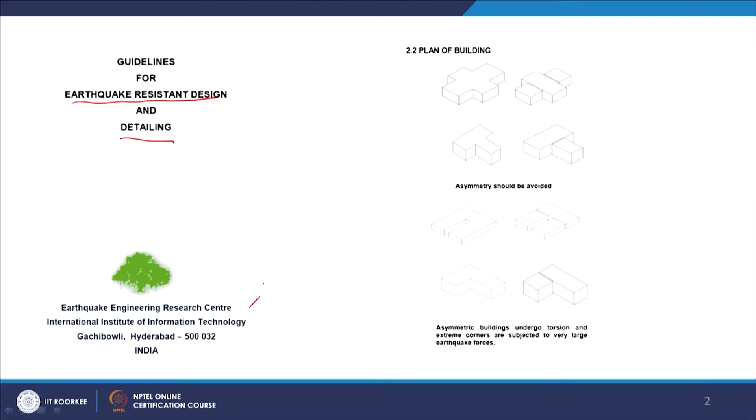For example, this is a guideline developed for earthquake resistant design and detailing by EERC, the Earthquake Engineering Research Center, International Institute of Information Technology in Gachibowli, Hyderabad. They have set up a lab, worked on simulations, and concluded with various evidence based analysis. They developed a small manual which gives thumb rules to inform built environment professionals, for instance an architect or a civil engineer who is constructing housing.

When we talk about the very basic form of house composition, planning of a house or a dwelling, we follow certain elements and principles of architecture, and then we compose. In this composition process, as far as earthquakes are concerned, they recommend avoiding asymmetrical compositions in earthquake prone areas, because asymmetric buildings undergo torsion and extreme corners are subjected to very large earthquake forces.

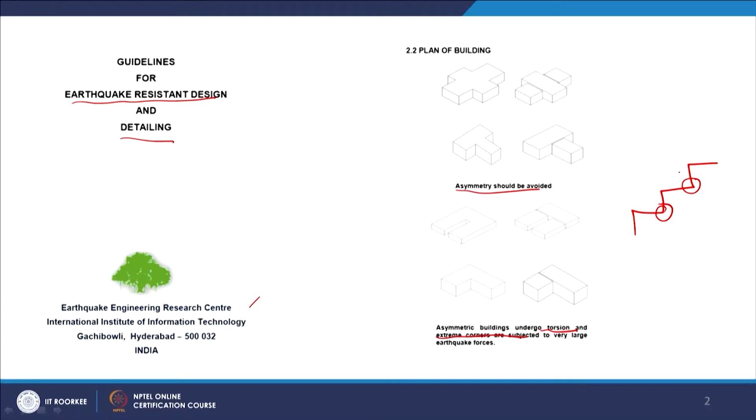So obviously, if you have wings and many offsets in the buildings, there is a tendency that these corners can break, because most of the damages we have noticed in past earthquakes mostly occurred in the corners. That is why they suggest avoiding asymmetrical building forms.

Some of the other guidelines talk about site selection. When you are constructing a building, try to keep sufficiently away from steep slopes. Also, when you are cutting and filling the soil, try not to make the foundations in the filled up soil, because it might come down and the whole load will collapse. There is a possibility that the building may collapse at the time of an earthquake, because the forces cannot be stabilized due to that filled soil.

Regarding the shape of the building, they suggest that very slender buildings should be avoided, with the height to breadth ratio less than 4. Inverted pendulum type buildings are unstable, so they go with a pyramidal type, so that the load is distributed. Otherwise, the more height you go up, the more difficult it becomes, with wind movements and lateral forces applied onto the whole structure, and how it can resist them.

For instance, in Hyderabad, we have a nickname, Malakpet Buj. It's a tall tower which has been built in a place called Malakpet, and you can see that it has almost nine floors with the ground floor, G plus 9 floors.

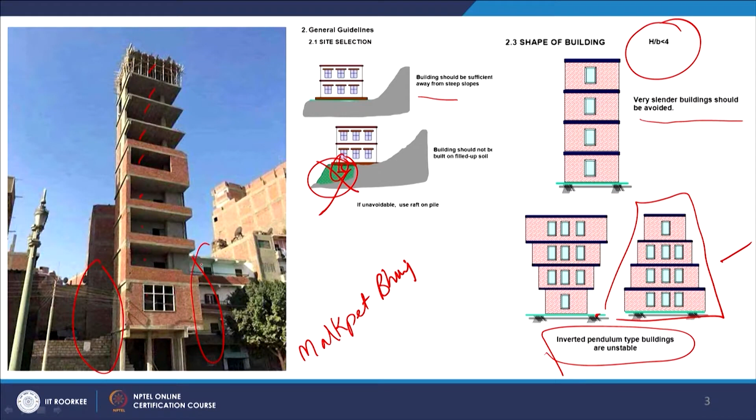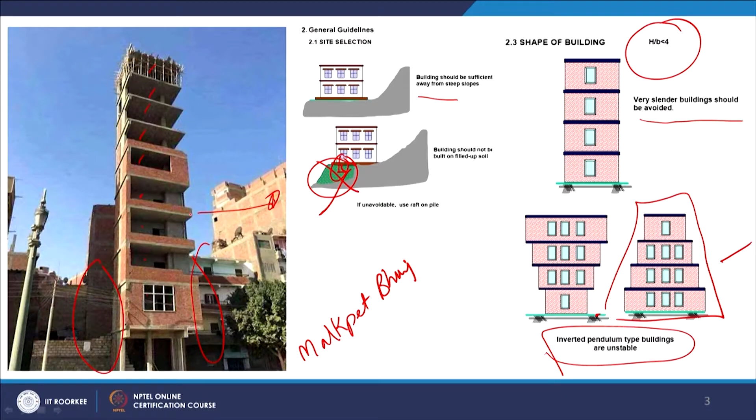And look at the volume of the building, look at the height and breadth of the building, and also look at what is on the adjacent sides. If some slight movement happens, you can see that the next building is also coming up at similar heights. So certain towers are not leaving any setbacks, and they are not considering proportions, how the proportions of height and breadth have to work.

And this is where, despite the building regulations, the building bylaws, the permissible limits, yes, he is going within that permissible limit, but is it really worth it, and can it resist the earthquake forces during an event? So these are some mismatches between what the building bylaws permit and what the earthquake guidance is telling. There should be a consensus between the bylaws and the structural measures which the guidance manuals suggest.

And similarly, a sudden change of lateral stiffness should be avoided. When we are increasing the height, you should not increase it so that there is a sudden change of lateral stiffness, because otherwise there is a chance of collapsing.

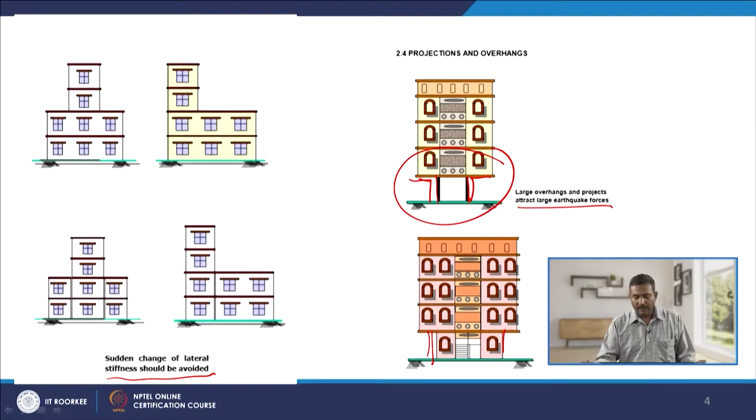Similarly, projections and overhangs. Here, just on two stilts, the whole building has collapsed. This is very unstable, so you need to have some kind of support system. With these kinds of large overhangs, you are keeping load over a load, and it may collapse. Large overhangs and projections attract large earthquake forces.

Similarly, the separation of dissimilar buildings. When you are talking about two different buildings, if it is a load bearing structure, you should have about 15 mm, if it is an RCC frame, it should have 20 mm, and if it is a steel frame, it is about 30 mm. At least this much gap should be left to avoid collision between adjacent dissimilar buildings.

Also, we should try to avoid heavy mass at the top, because in the previous building culture, they built overhead tanks with heavy volumes. But during the movement, that can add load and bring instability to the whole structure. So the advice is, instead of a large tank, you can have smaller tanks connected to the water distribution system, so that you will not get those load aspects.

These technical manuals also talk about the type of reinforcement and the connection details. For example, for a 1 feet beam, they talk about the reinforcement, the stirrups, and how the clear cover has to be done. The stirrup details are also given as guidance, how to mold them, what to do and what not to do.

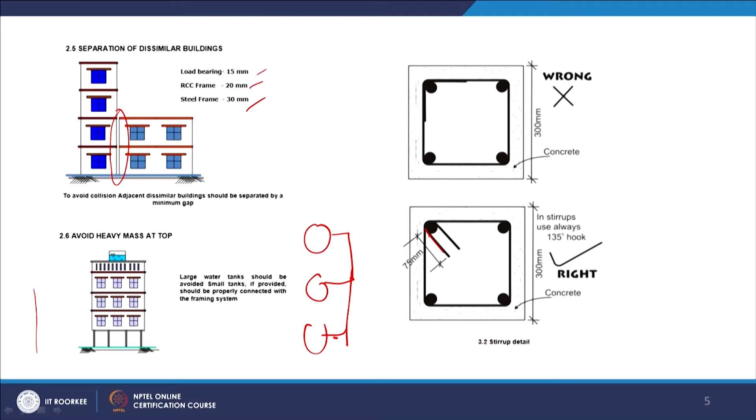After the tsunami, the Government of Tamil Nadu, with the help of the Revenue Administration Disaster Management and Mitigation Department, developed guidelines for reconstruction of houses affected by tsunami in Tamil Nadu. I'll show you a brief of what is in the guidelines, and I'll keep discussing various guidelines. They also talk about the wind and cyclone zones.

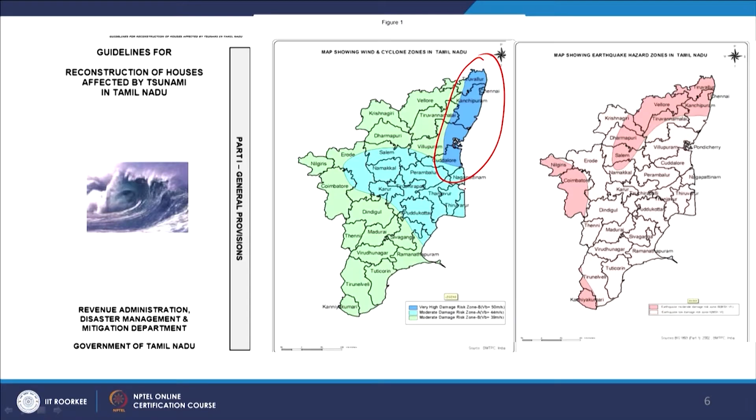For instance, this is the high damage risk zone, more towards Chennai, this is moderate, and this is beyond the cyclone aspect. Whereas in the earthquake map, this zone is more earthquake vulnerable. Also the hilly areas of the Nilgiris, a bit of Kanyakumari, and the part of Kerala where the Western Ghats meet near Nagercoil and other places. So these are the vulnerable areas.

But when you see these kinds of maps, you should not look at them in an isolated manner. You have to also consider the multi-hazard prone aspect. The same district might be cyclone prone and also an earthquake hazard zone. So one has to look from that perspective.

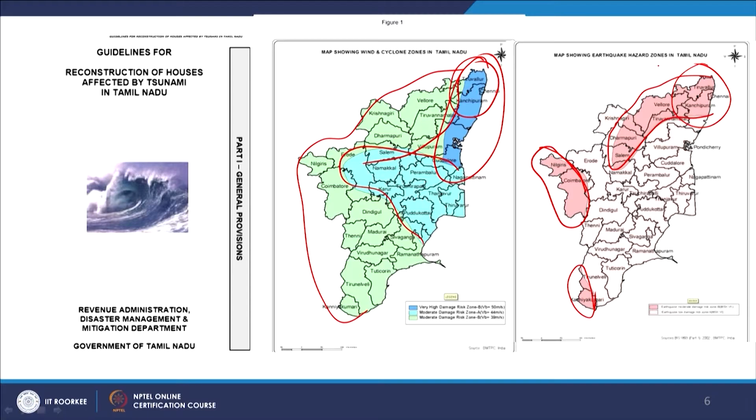They also talk about the CRZ regulations, the coastal regulation zone implications, like at least 500 meters from the shore and plus 5 meters from the mean sea level. So they also talk about, because if you don't raise it, either you improve the height of the plinth of the building so that if there is a tsunami, or you raise the plinth so that at least this will be taken care of.

Similarly, there's the desirable conditions. When you talk about building near a ridge, it attracts high wind velocity, but buildings in a valley are protected from high wind velocity. I would also bring a counter aspect of it. It also depends on how the makeup of the hill and the landscape is all about, because sometimes if you have another hill, that becomes a tunnel effect, and the wind gets channeled much more fiercely. So there's no shielding from high wind due to absence of a barrier, and that is where you need to talk about the landscape, how we can promote the landscape so that it can actually reduce the velocity of wind and have a control mechanism over there.

As I discussed to you in an earlier report, which talks about the planning requirements, don't make asymmetrical plan forms, and also don't have too many offsets. Here this is like too many offsets, it's asymmetrical. Try to make more of a defined shape, because that is where you can even have diagonal bracings, some kind of support system, so it is at least bound to it. This plan should be square or rectangular, and if it is rectangular, you need to have intermediate support systems into it.

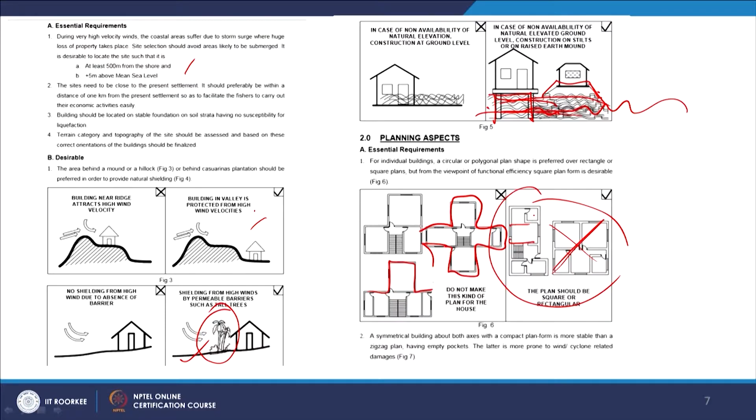Asymmetric buildings with empty pockets are more vulnerable to damage, so don't leave these empty pockets. Try to fill that, and that is where these are more stable. The symmetric buildings are more stable.

Also, when we talk about row house planning, it also creates wind tunnel effects, because the moment your houses are one step to another next to the shore, it channels the wind, and that is where it can damage the edges of the walls or the corners. So even the zigzag planning can avoid wind tunnel effect. How you can actually give a little bit of vastness and then reduce it, so the zigzag pattern as well can have some control. It depends on how you are actually orienting it.

Similarly, the long face of the building facing the wind direction - in fact, if you ever visit the coastal villages of Tamil Nadu, most of the time the short face of the building is facing the wind direction. Whereas on the horizontal face, they have fewer openings - if they are facing that side, they will have fewer openings, otherwise they mostly orient so that the shorter side faces the seaside. That is how they are oriented.

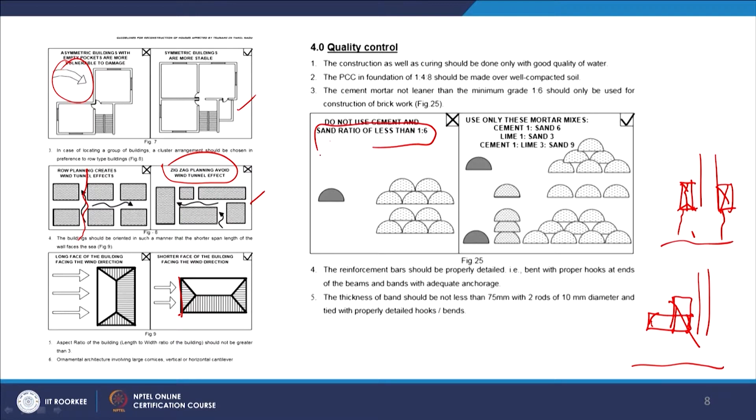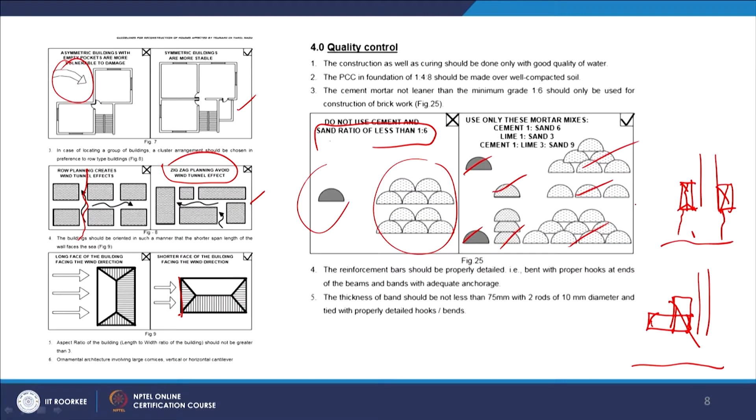Similarly, these manuals also talk about quality control, in terms of the material and what ratios we have to include. So when we say do not use cement and sand less than 1:6 - for 1 part cement and 6 parts sand, you should not make use of a mortar mix less than 1:6. It is recommended to use 1 cement and 6 sand, or 1 lime with 3 sand, or 1 cement, 3 lime and 9 sand. This is the kind of mortar mixes which the guidelines normally recommend. At the end of the day, all these come from the proper IS code, but these are only thumb rules.

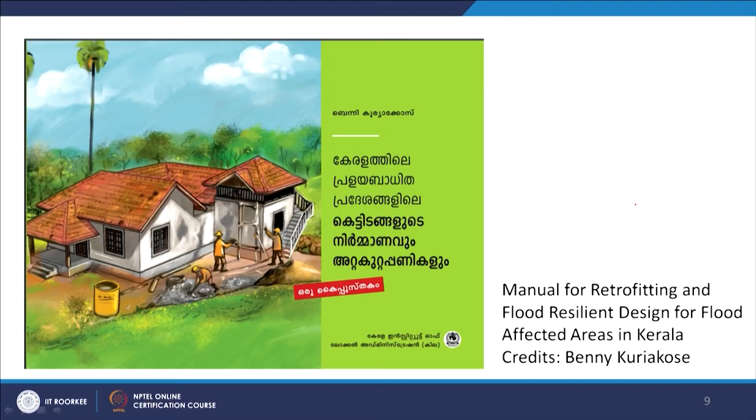Many of these manuals, when published in English, become very hard for a local mason to understand. That is where recent efforts have been done by architect Benny Kuriakose after the recent Kerala floods. He developed a manual for retrofitting and flood resilient design for flood-affected areas in Kerala. The Malayalam version is already printed and the English version is in process, but I could still show you some images of his work, which is very diagrammatic and illustrative.

Before coming into the solutions, he actually explains the situation and the causes. This is a very important aspect of developing any guidance. One has to understand the consequences of these disasters, and especially the root causes for it.

Whether it is orientation, type of construction, or siting - all of this matters. For instance, here you have the normal setup where you have the river level, and they've built on top, on the mountains, with the average flood level reaching here. But after the construction of dams, people started construction near the river beds, because they knew the water was not coming very frequently. That's how they started coming down and even building houses near the river beds.

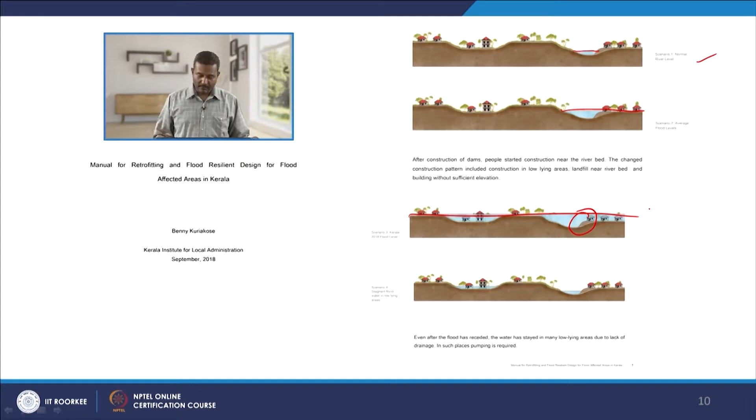That is where you can see that in 2018 the Kerala flood almost submerged 3/4 of the houses, even those on top.

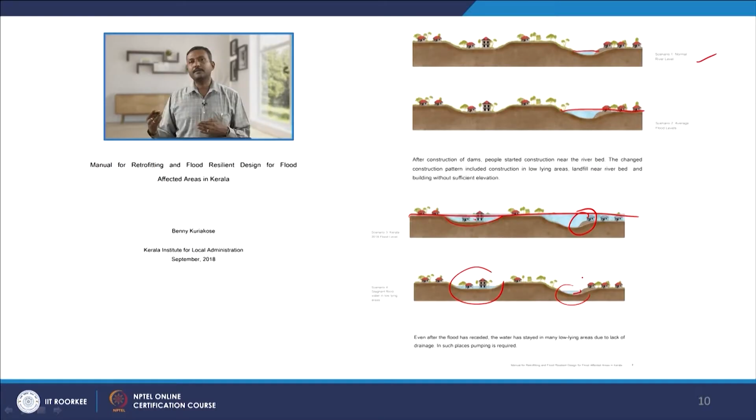But even after the flood process, when this kind of situation occurs, even after that these low-lying areas are still left over with water, and that is creating endemic and epidemic diseases which are spreading - that is an even bigger disaster. It takes so much time, and the water has stayed back even after the flood and even after the rescue process - the same story in Kashmir, the water has stayed back because the main issue is lack of proper drainage systems.

The Chennai floods are the same, because that is where the planning situation and the service infrastructure orientation has to be addressed.

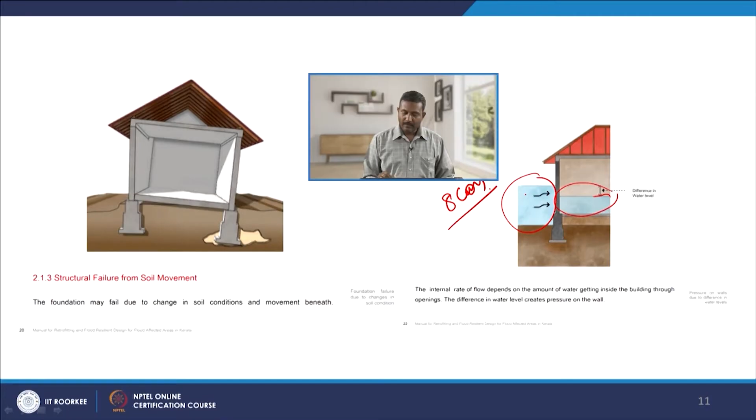When the water keeps coming into these areas, there is also a difference in water levels - the amount of water that enters versus the amount outside. This is almost equivalent to 8 cars' worth of load pushing this wall. This difference in water level creates pressure on the wall, and that is how there is a major scope that this wall might collapse, because there are two forces - one smaller, one bigger - and it's pushing, almost about 8 cars worth, and that balance is missing.

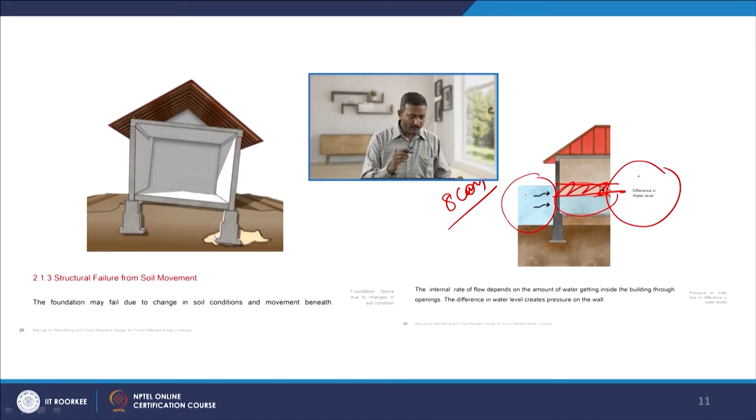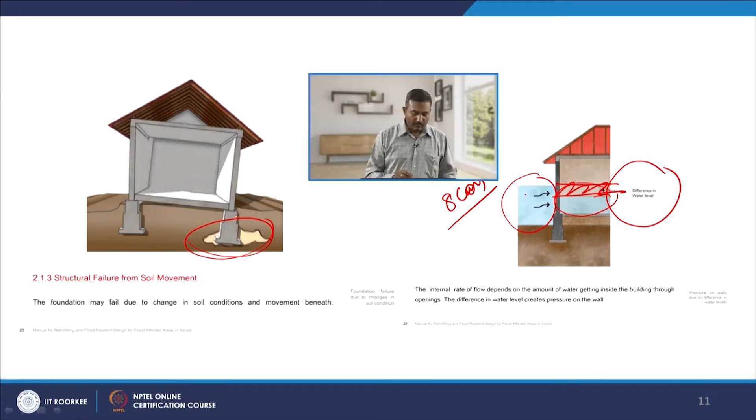And as the water recedes, it takes out the topsoil. The moment the topsoil goes out - and the foundation we're talking about may be 1000mm - this can loosen and change the soil conditions and cause movement beneath. So in that way there is a possibility that these houses may collapse.

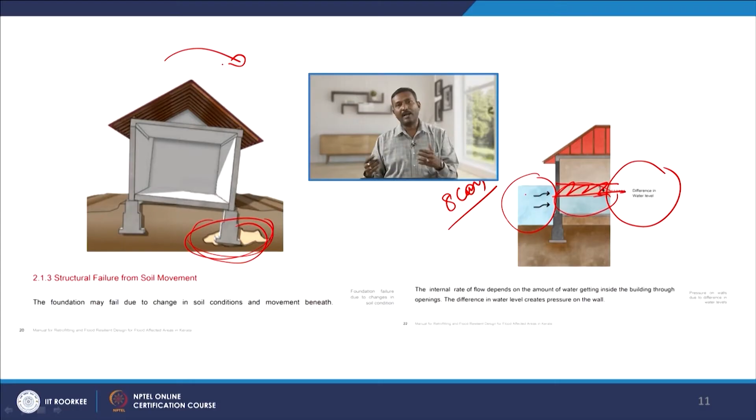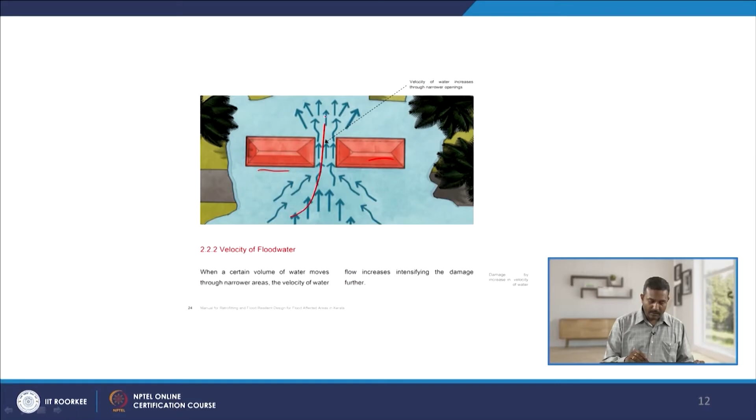That is what we have seen in those videos. Also the velocity of the flood water matters - similar to what the tsunami manual discusses - the moment you make these row houses like this, it creates a bottleneck process that intensifies the pressure. So the water affects the whole damage process, both the walls and the foundations.

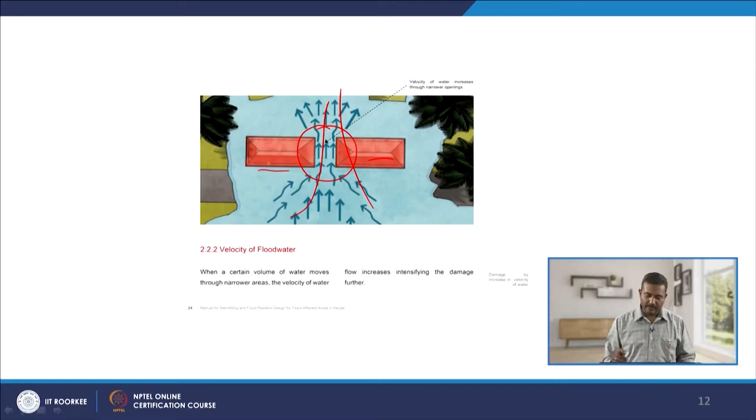These are a few glimpses of the reasons, but there are many others which he has explained in his manual. And in fact, how to retrofit these things - because there are solutions, not only the causes for these aspects, but you also have to talk about the solutions.

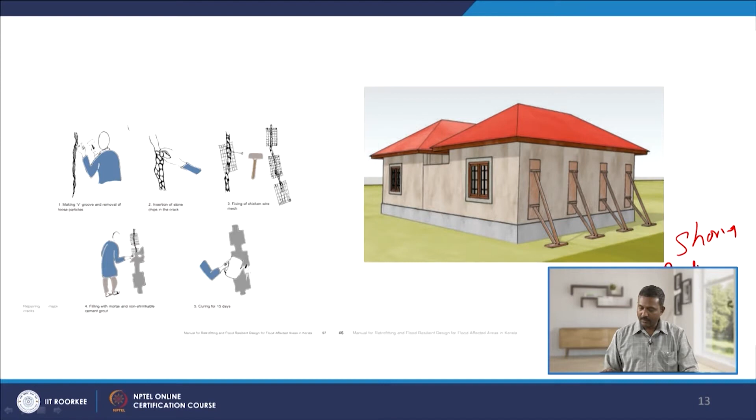So when we say solutions, how to retrofit it - what are the techniques one can use? For example, in architecture we might have studied shoring, raking shores, and underpinning. These are various techniques we learn from our architecture building construction subject. But this is where you really apply it, because in order to protect this wall during the restoration process, you need to apply these shores to give a kind of temporary support until the restoration or retrofitting is done.

Now there are different ways he explains for different scales of these cracks. For instance, if it's a smaller crack, you make a V-groove and remove loose particles. Then insertion of stone chips - a galleting technique - keeping the stone chips, then fixing a chicken wire mesh all along, and filling with mortar and non-shrinkable cement grout, curing it for 15 days.

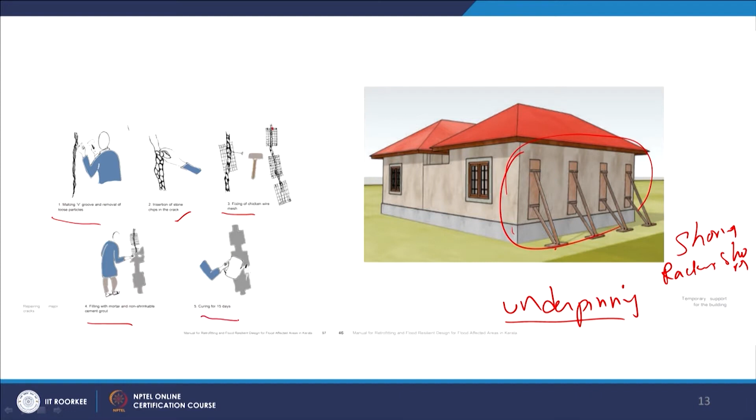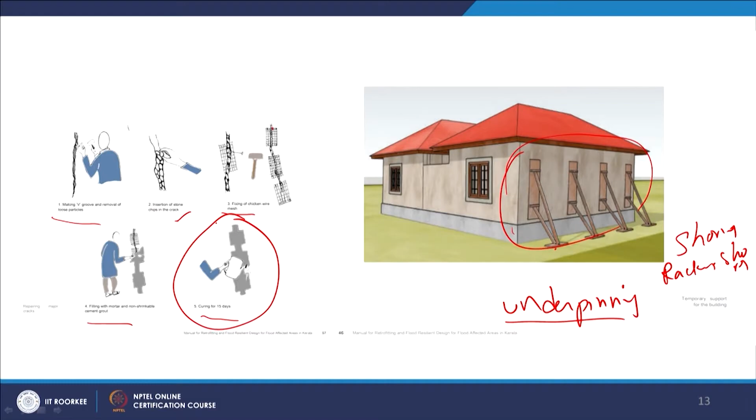The curing is the most important part - everyone ignores this curing part. It's not just the plaster part of it. So these are a few techniques he comes up with for how to retrofit these things.

Till now we have discussed manuals and guidance from a very disaster-focused perspective, whether it is earthquake-focused, tsunami-focused, or flood-focused. But in the Benny Kuriakose work, we observed these are translated into local languages and illustrated in a more diagrammatic manner, explaining the cause, the reason, and the impact. So there is an issue, a cause, and an impact, and as a result, how we can deal with this as a solution. That is how these manuals have been framed.

When we talk about manuals or guidance, we understand they show a broader picture. But what about the state government of Tamil Nadu, or engineering structures like GSDMA, the Gujarat State Disaster Management Authority, which have issued manuals for retrofitting or reconstruction? The whole state is very diverse. It has its own regions, its own unique geological, geographical, and topographical conditions, and a unique, very diverse landscape.

If you take Gujarat as a state, you have the desert part and the Banni grasslands part. Similarly, in Tamil Nadu, you have coastal Tamil Nadu and the Nilgiris as a mountainous place. Each state is subcategorized by different cultural geographies, which is not only geography but also varies with cultures. The moment culture comes into it, it is reflected in building practices, whether it is the type of construction, the alignment of a house, the dwelling typology, and belief systems.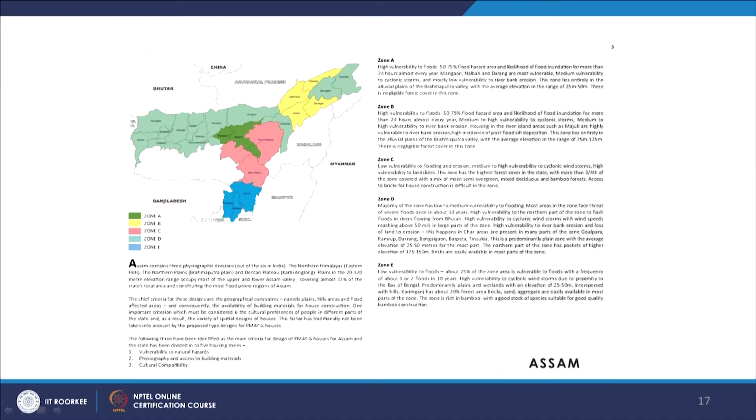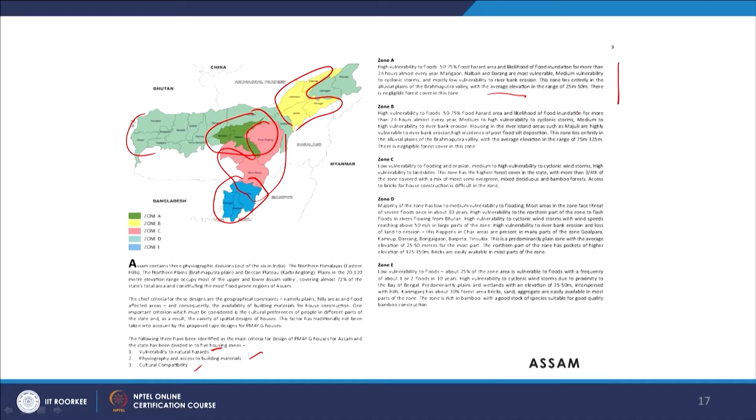I'll show you one example. Take the Assam state, where you have Zone A here, Zone B, and Zone C, which is towards the Bangladesh and Manipur side, and Zone D and Zone E. These are all classified by vulnerability to natural hazards, physiographic conditions, access to building materials, and cultural compatibility. They have even described what Zone A comprises in terms of high vulnerability, especially to floods, what kind of floods, what kind of riverbank erosion, elevations, and forest cover. That's how the description of each zone is given.

In Zone A, it is based on high and medium vulnerability to cyclonic storms and mostly low vulnerability to riverbank erosion. This particular typology is a house they try to document, responding to brick masonry houses with 3-inch walls, which are most common.

This is an effort to validate these existing rural housing typologies — how structurally one can validate them, because earlier whatever rural technology existed was often ignored in favor of a uniform, standardized solution. This is an effort to bring back that local character while still validating those techniques.

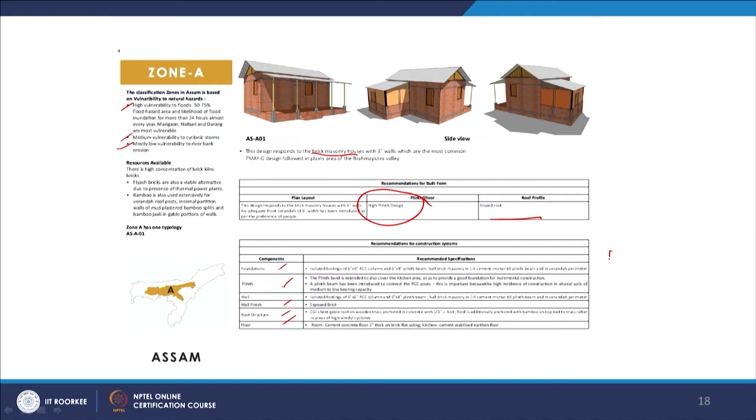Now it says about the plinth, the high plinth design and the sloped roof. It also talks about the foundations and the wall finish, plinth, roof structure and the floor, and it's all talking about the recommended specifications of it.

Then a typical dwelling unit, like this is one typology, and you can even think about the basic dimensions which are existing, and how one can understand the span of 6 feet 3 inches, and that is how a framed structure could also be thought of.

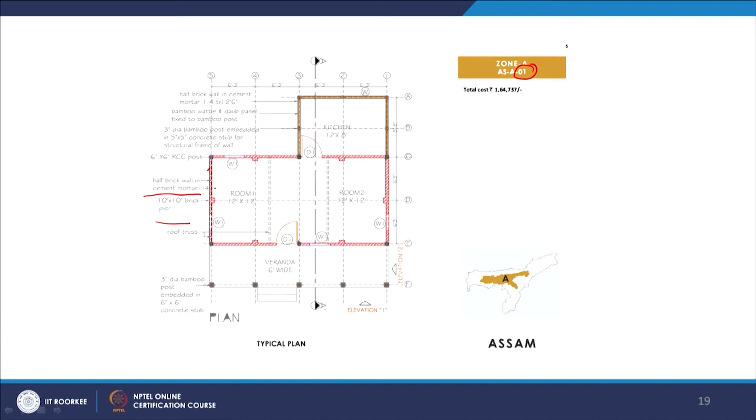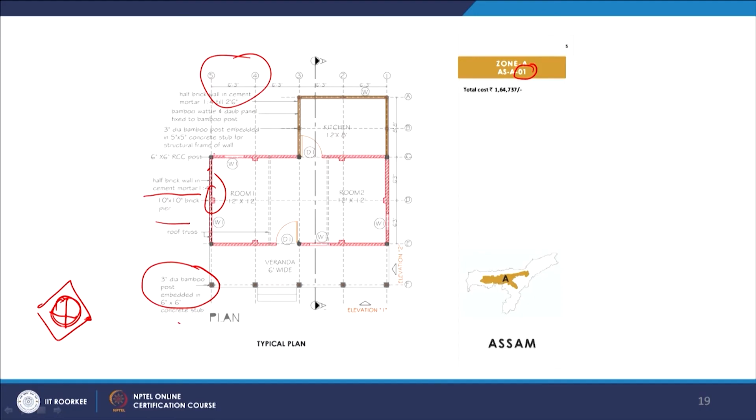And here you can see the half brick wall in cement mortar 1:4, whereas if it is a brick pier, a 10 inch by 10 inch brick pier, for each you are getting a 6 feet 3 inches span, and also a 3-inch diameter bamboo post embedded in a concrete stub. So basically you have the concrete, and the bamboo post embedded within it acts like a reinforcement. So this is a basic understanding of the plan forms.

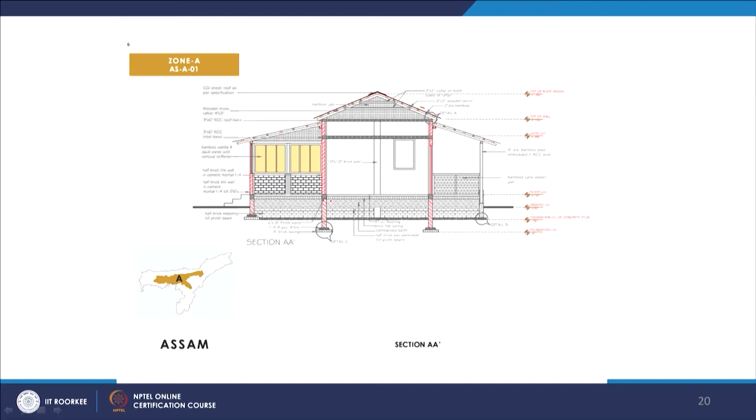And then it goes back to the heights and the material components in it. So how the wooden purlins work, how the collar beam works, how the brick foundations have to be. So it gives the more technical details of how one can construct in this format.

Then comes the cost estimate for Zone A, Design 1. When we talk about cost estimate, it covers excavation, brick soling, PCC, brickwork foundation, brickwork above plinth, concrete. What is the ratio we are talking about? 1:1.5:3. It's always a multiple of the aggregates. And the reinforcement steel, truss, and then GCI sheet, door, window, cement and plaster.

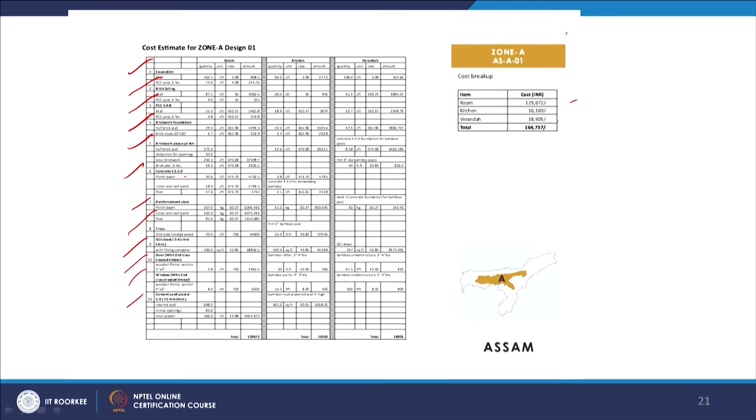So in that way, they have been composed with how much it is going to cost per room, kitchen, veranda, and the total is this much. And how do they calculate it? This is where the integration of quantity, pricing and specifications comes into the picture. Also, one will have to understand the labor rates of that region. If it is the Delhi area, you have to talk about the Delhi schedule of rates, DSRs. And if it is a CPWD agency, then you have to analyze.

There are different ways one can get these rates, whether it is a labor rate, a material rate, or a steel rate. If it is 1 ton, how much steel it is working. If it is brickwork, how much brickwork is costing, and for this amount of brickwork, how much labor is worked out. So this whole thing is a kind of cost breakup, so that at the end you are able to come up with some kind of guidance. From 1,64,000, one is able to get this kind of house. So this is giving you a detailed version of what to do and how we can bring these rural typologies into mainstream practice.

Similarly, there were efforts in countries like Pakistan. There has been a guidebook for technicians and artisans. Like in India also, in Himachal and Uttarakhand, we have Dhajji wall constructions for 1 and 2 story earthquake resistant houses, where you have the timber frames with embedded infill, whether it is stone, cobbles or pebbles, or flint. So they have developed technical manuals for these Dhajji constructions.

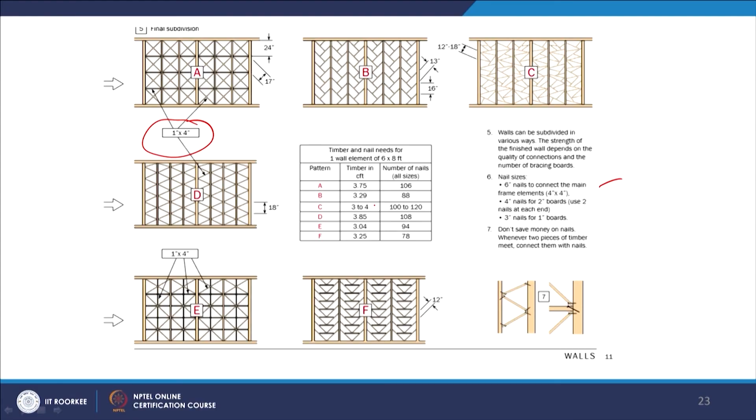So this is a brief about these manuals. Of course, there are many manuals in different languages, but I tried to show you the Indian context and Pakistan. So this is good enough for an architect to look into some thumb rules for low cost housing as well. And one has to understand that giving it in a local language, so this technical information can reach the common man and the layman, is one of the important objectives of these manuals. I hope you are familiar with these manuals and the guidance now.